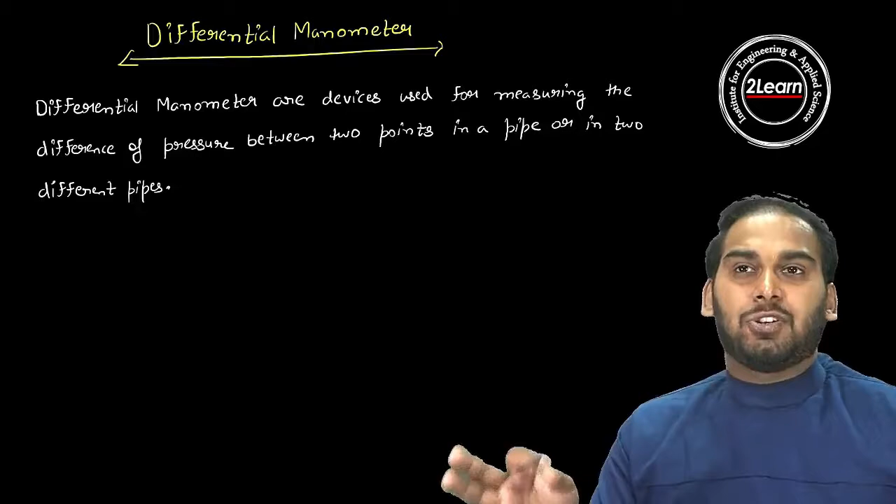So let's start by differentiating the simple manometer from the differential manometer. The first part is differential manometer. Differential manometers are devices used for measuring the difference of pressure between two points in a pipe or in two different pipes. So here we saw what function the differential manometer performs.

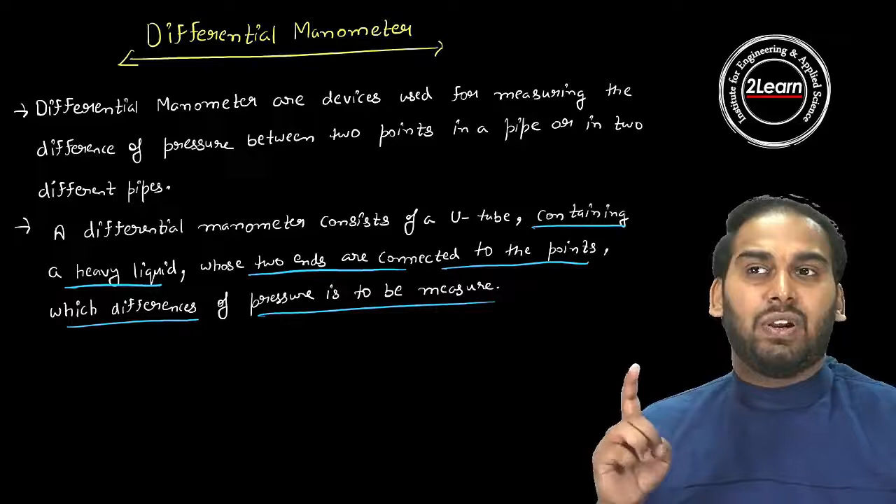Next, the second point is that a differential manometer consists of a U-tube containing a heavy liquid whose two ends are connected to the points where the difference of pressure is to be measured. So all these things come under differential manometer. We will draw a figure for this and clarify how the U-tube manometer appears here.

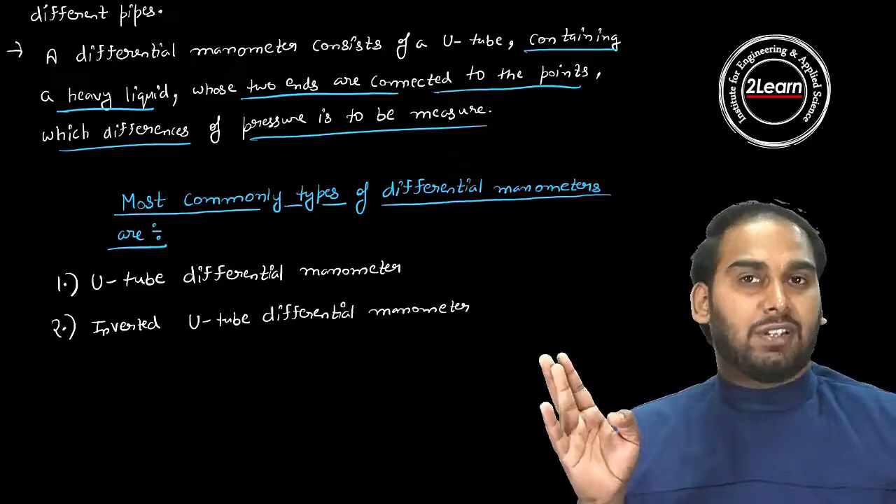So the most common types of differential manometer are two: the U-tube differential manometer and the inverted U-tube differential manometer. We will draw figures of these and see what type these manometers are.

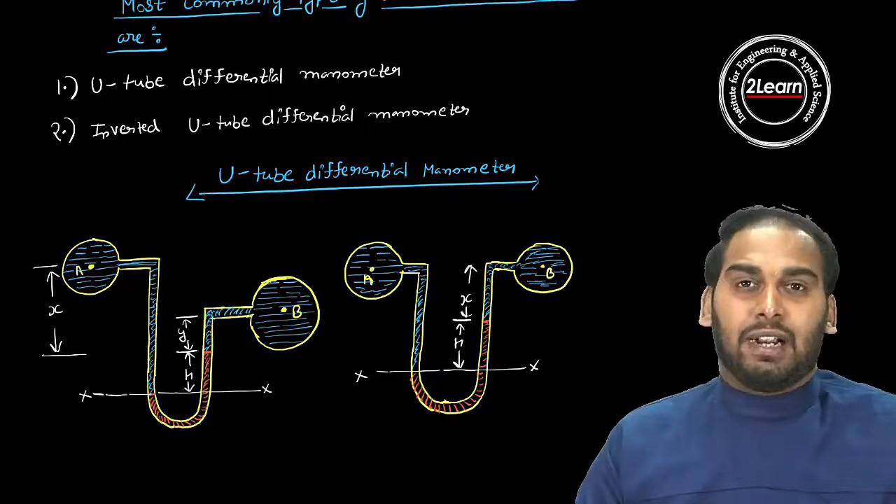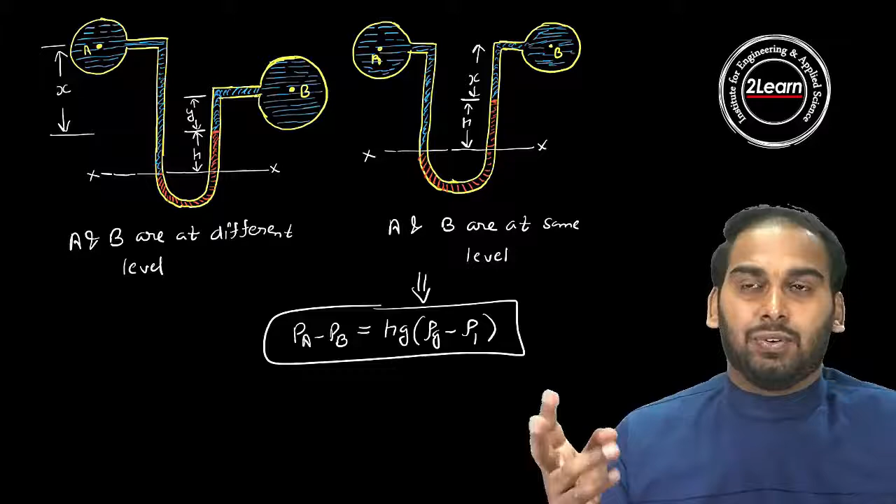Now the pressure variation is PA minus PB equals h g into rho g minus rho 1, where rho 1 is the particular density of fluid. It is rho 1 g into x plus h.

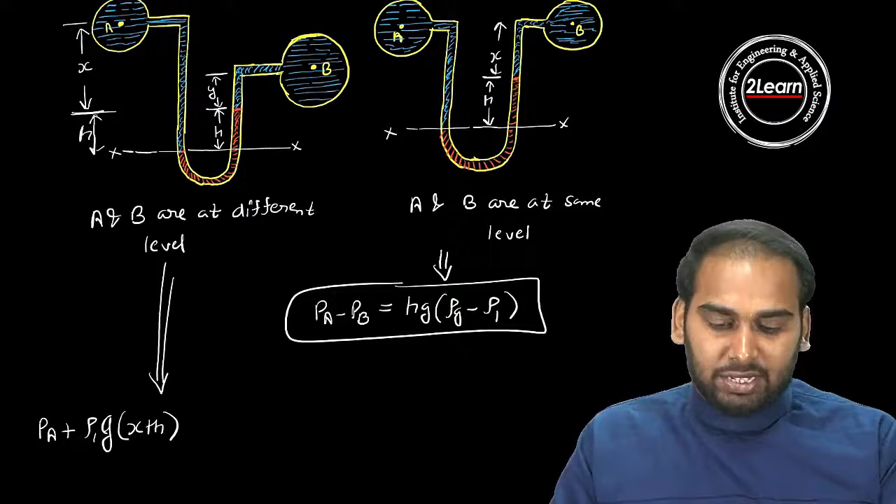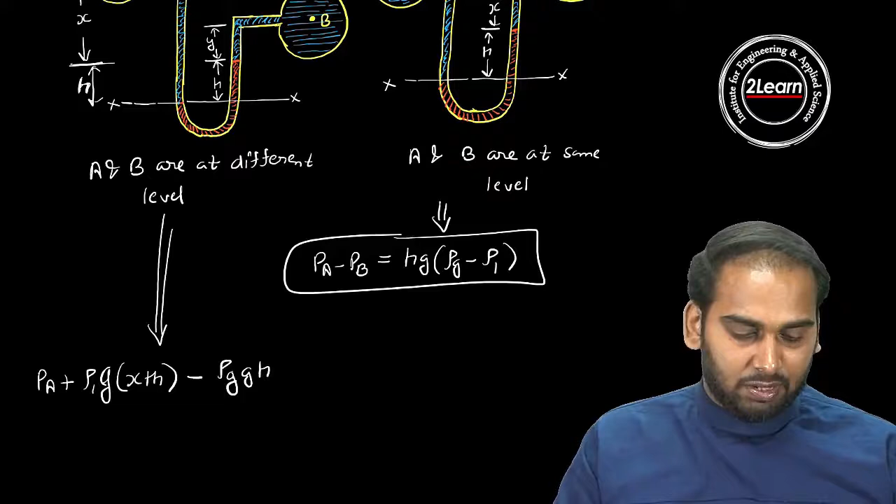Why did we write this? Because x is the vertical distance, and after that it will be h, so total h is x plus h. So in place of rho 1 g h, we wrote rho 1 g into x plus h. Minus, now moving in the upper direction, it becomes rho g into g h, till this one point.

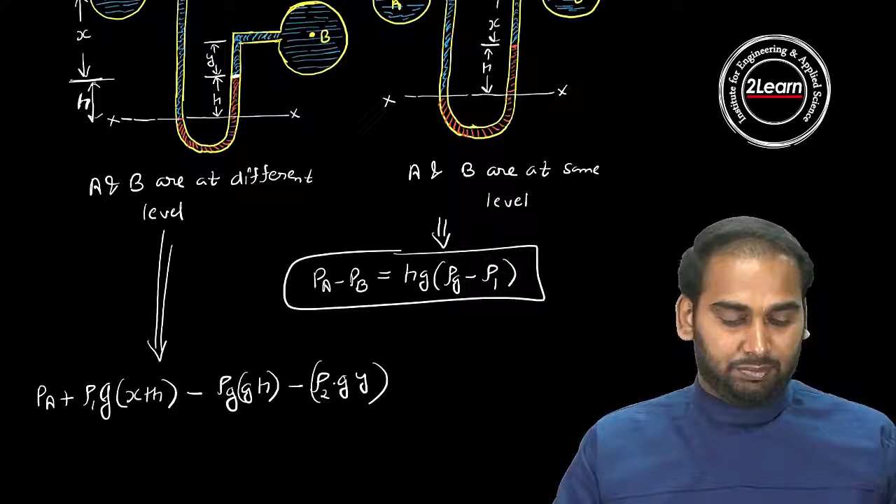Then for the y distance we take rho 2 into g into y, which is the particular density of fluid, and this equals PB. So PA minus PB will be equal to rho g into g h plus rho 2 g y minus rho 1 g into x plus h.

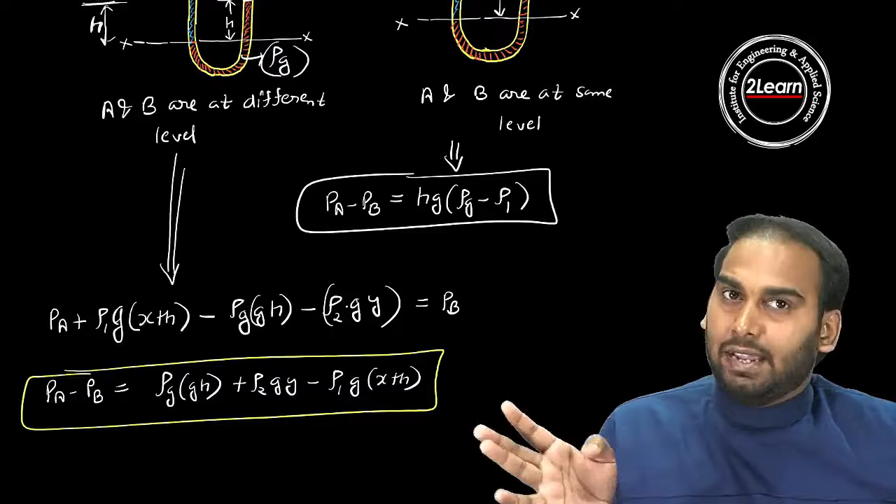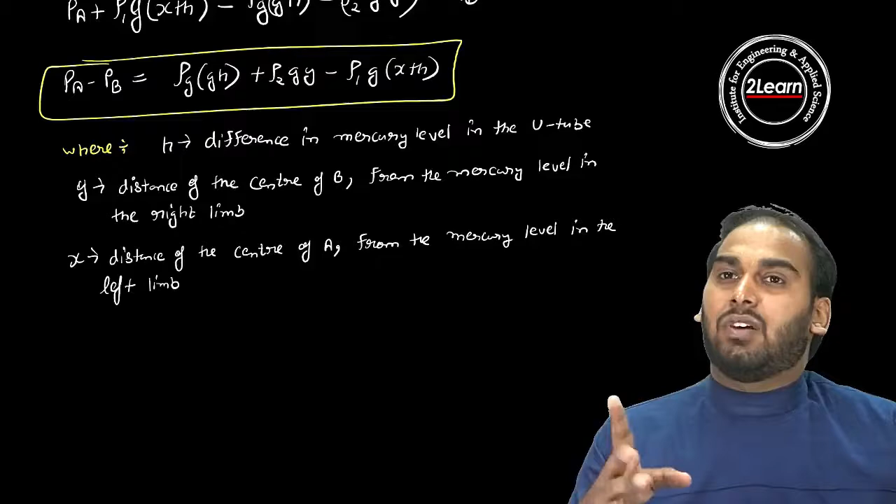So h is the difference in mercury level in the U-tube, y is the distance of the center of B from the mercury level in the right limb, as we have already seen, and x is the distance of the center of A from the mercury level in the left limb.

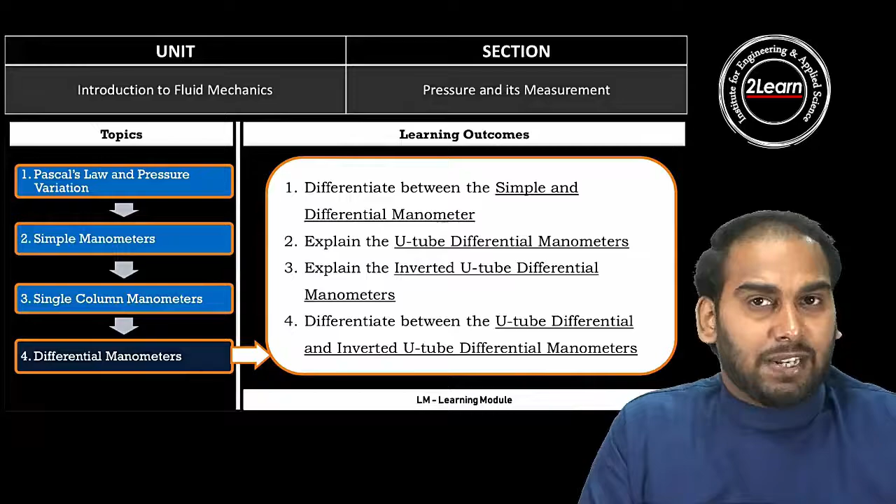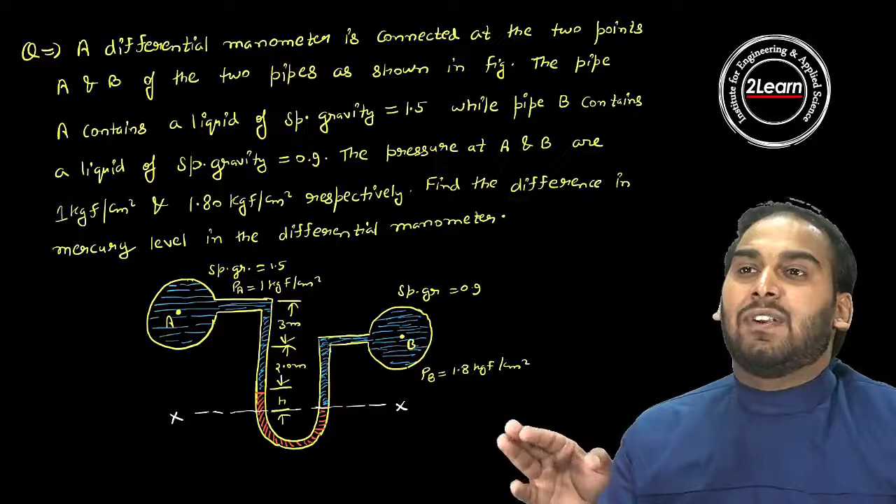So the question is, a differential manometer is connected at two points A and B as shown in the figure. Pipe A contains a liquid of specific gravity 1.5, and pipe B contains a liquid of specific gravity 0.9. The pressure at A and B are 1 kilogram force per centimeter square and 1.80 kilogram force per centimeter square. We need to standardize the units here. Find the difference in mercury level in the differential manometer. So let's start with the given data.

S1 is given as 1.5, then we can calculate rho 1. We multiply by 1000 to get the density.

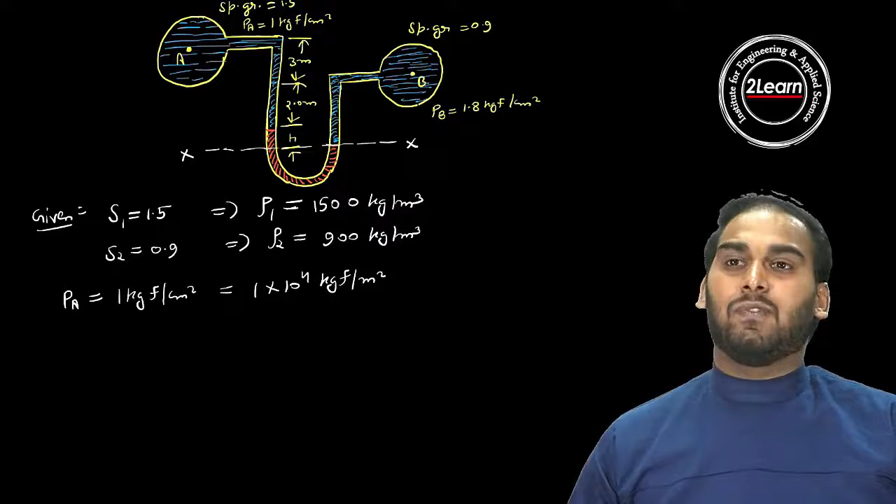Now PA is 1 kilogram force per centimeter square, so it will be converted to kilogram force per meter square. First we convert centimeter square to meter square: 1 meter has 100 centimeters, so centimeter square becomes 10 to power minus 4 in the denominator, which when converted becomes 10 to power 4. So it is 1 into 10 to power 4 kilogram force per meter square, and we know 1 kilogram force equals 9.81 Newton. So it becomes 10 to power 4 into 9.81 Newton per meter square.

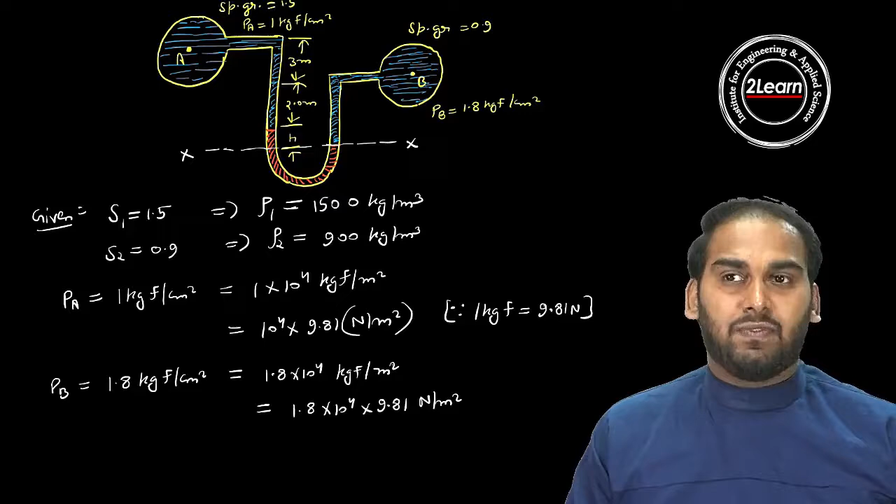So PB is given as 1.8 kilogram force per centimeter square. First it is converted into meter square, so it becomes 1.8 into 10 to power 4 into 9.81 Newton per meter square. The density of mercury is 13.6 into 1000 kg per meter cube.

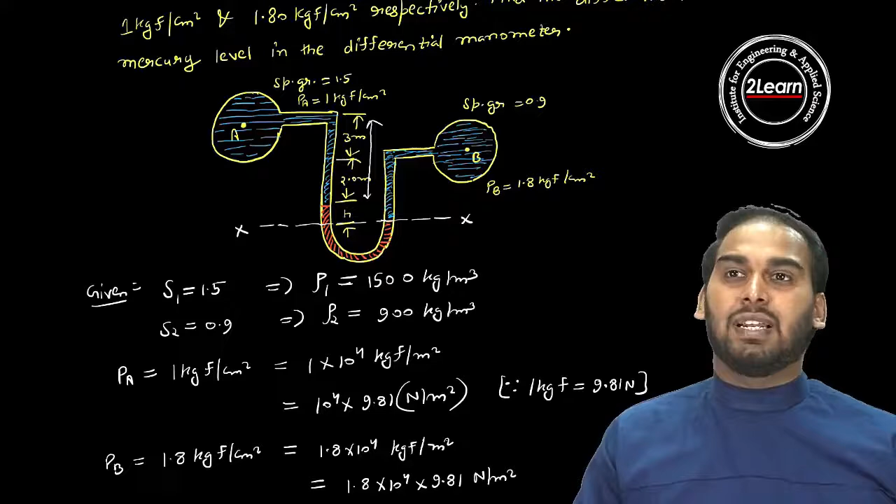Now we talk about the next part. Here it is 3 plus 2, we take this distance from here to here, then we get 5. That is 1500 rho, then g and h will be 5 here, plus PA which we calculated, this part is put here.

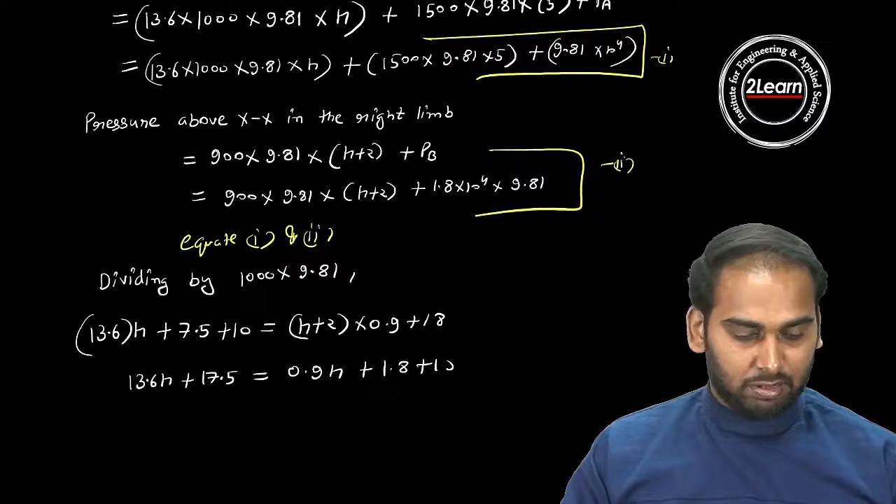Then it is h plus 2 into 0.9, positive 18. It is 17.5. It is 0.9h plus 1.8, positive 18. Then it will become 0.9h, positive 19.8.

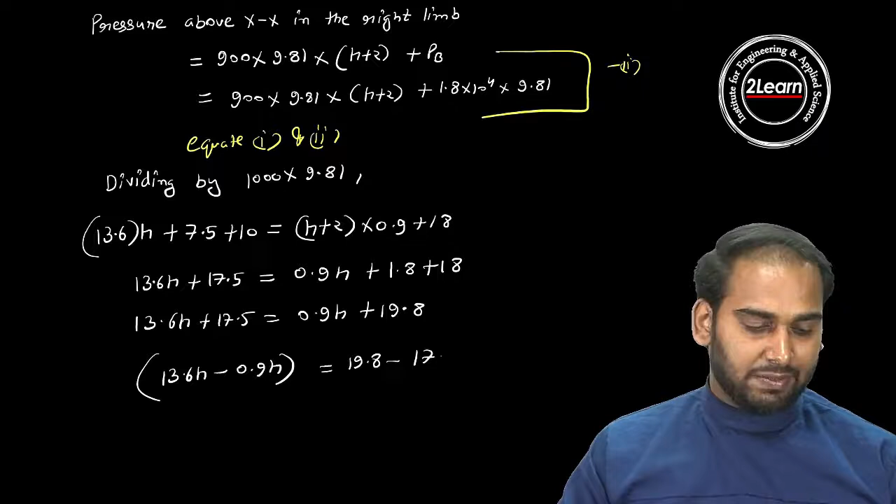So 13.6h minus 0.9h, 19.8 minus 17.5. Now we are able to find the value of h. So h is 18.1 centimeter.

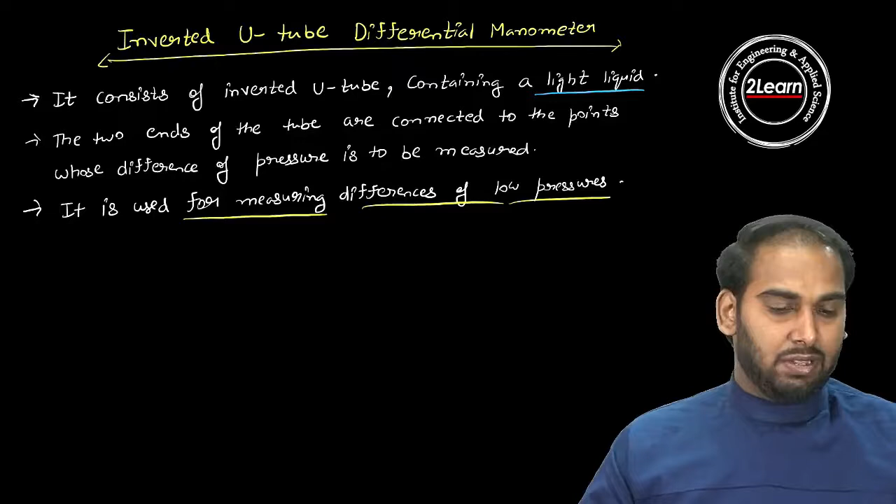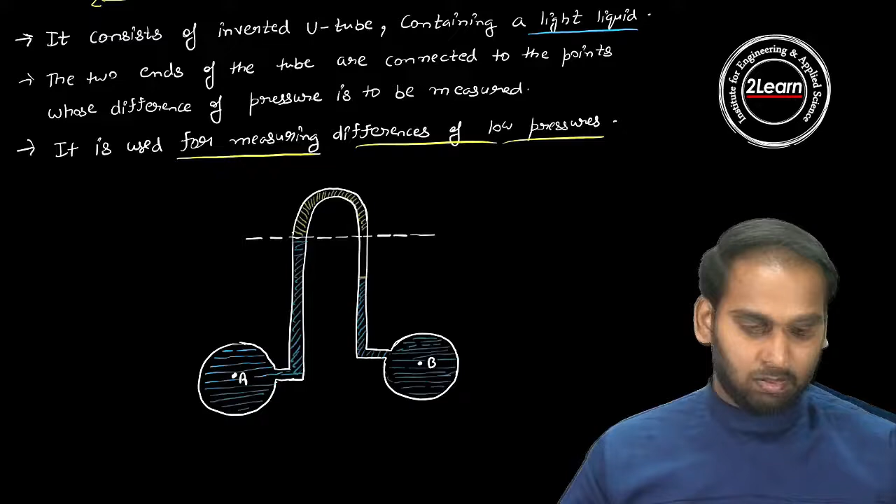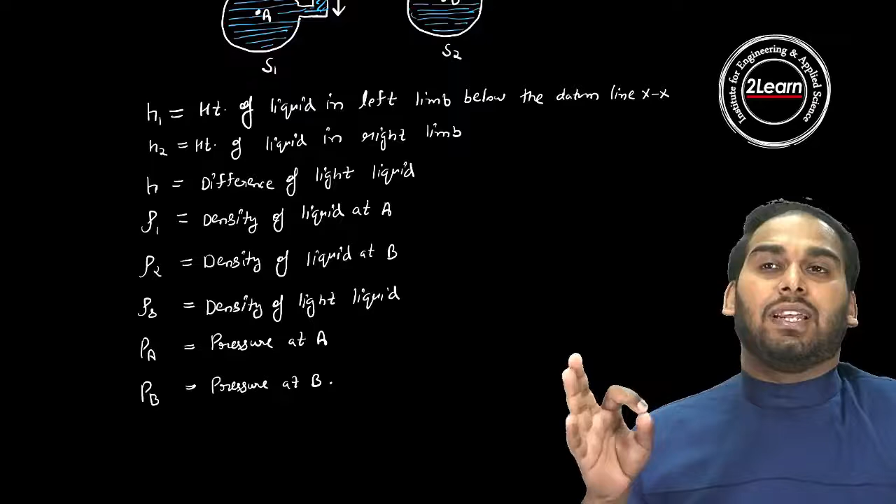These are the considerations here: H1 is height of liquid in left limb below the datum line XX, H2 is the height of liquid in right limb as we can see in the figure, and H is the difference of light liquid. Rho 1 is the density of liquid A, rho 2 is the density of liquid B, rho S is the density of light liquid, PA is the pressure at A and PB is the pressure at B. This is the diagram and definitions of inverted U-tube manometer.

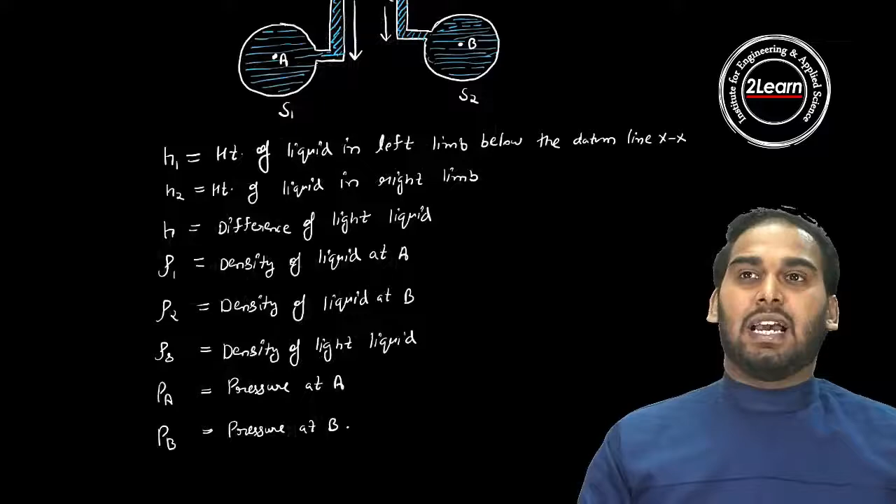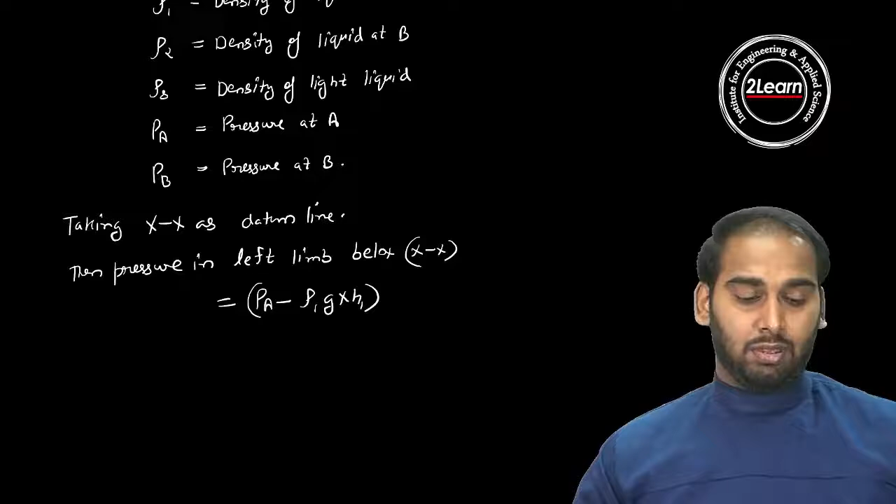Now, taking the help of the datum line method, we have to calculate pressure PA and PB. As we have seen, pressure in the upward direction is taken as negative. So we take rho 1 G H1 as negative, because the height we took while studying hydrostatic force: if H is taken in the downward direction it will be positive, and if H is in the upward direction it will be negative. So PA is positive and in the upward direction it will be negative: rho G into H1.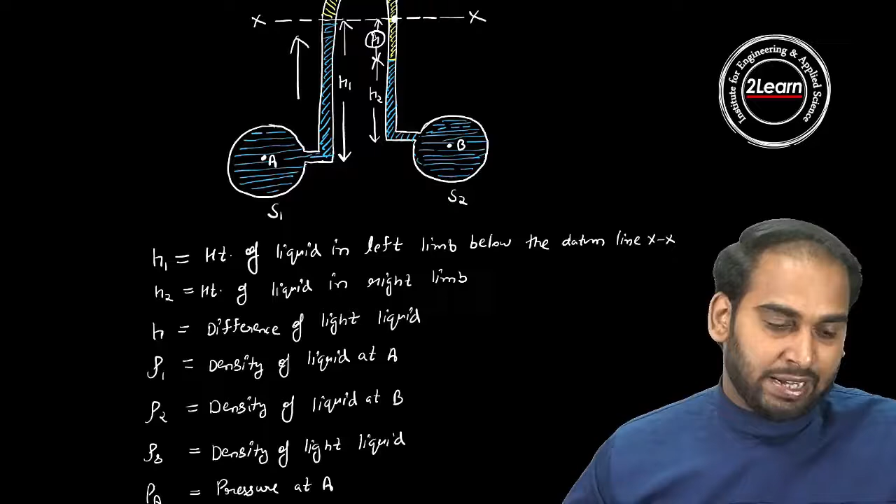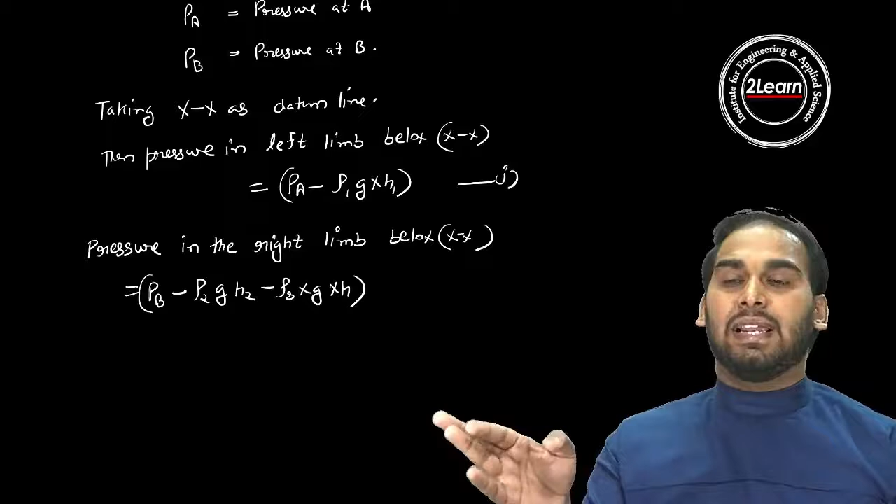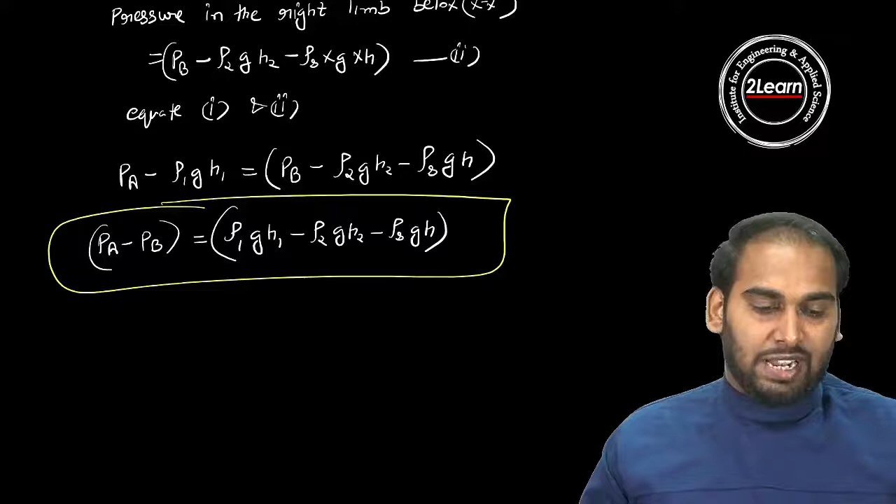I hope you understand this topic very well. So now we have been studying the inverted U-tube differential manometer. Before proceeding to the next part, let us check your knowledge.

In the given figure, an inverted differential manometer is connected to two pipes A and B which convey water, and the fluid in the manometer is oil of specific gravity as given. For the manometer reading shown in the figure, find the pressure difference between A and B. Let's start.

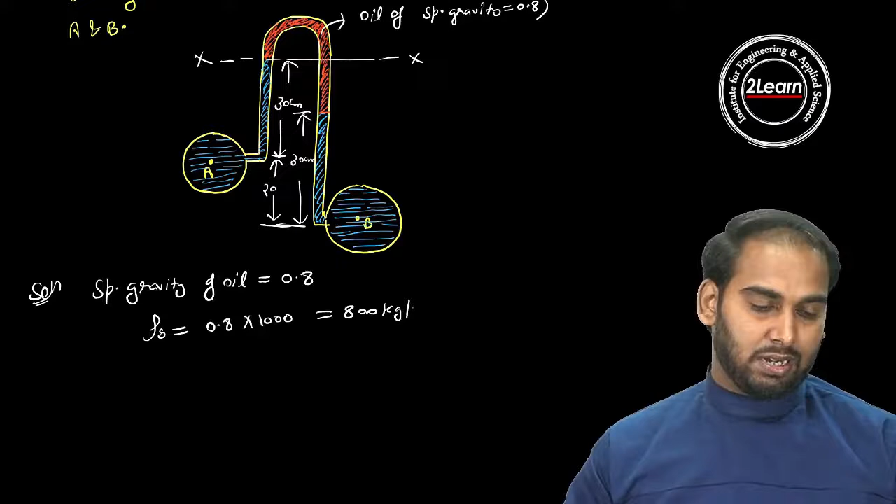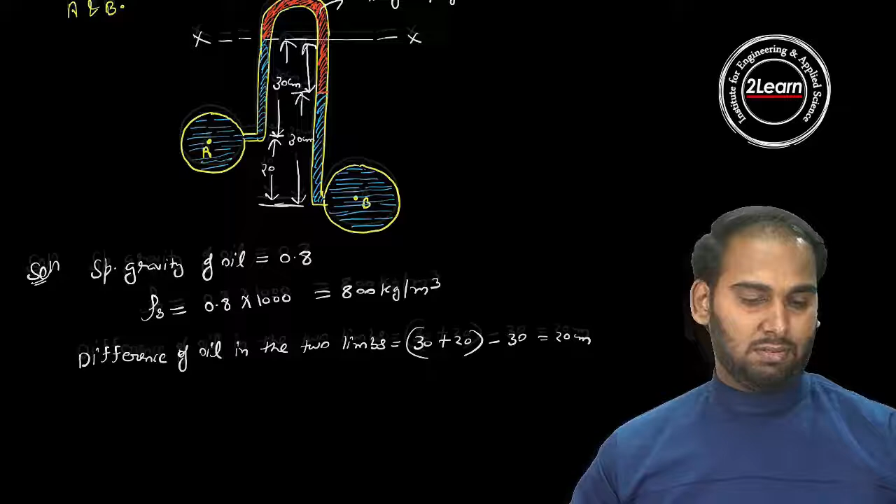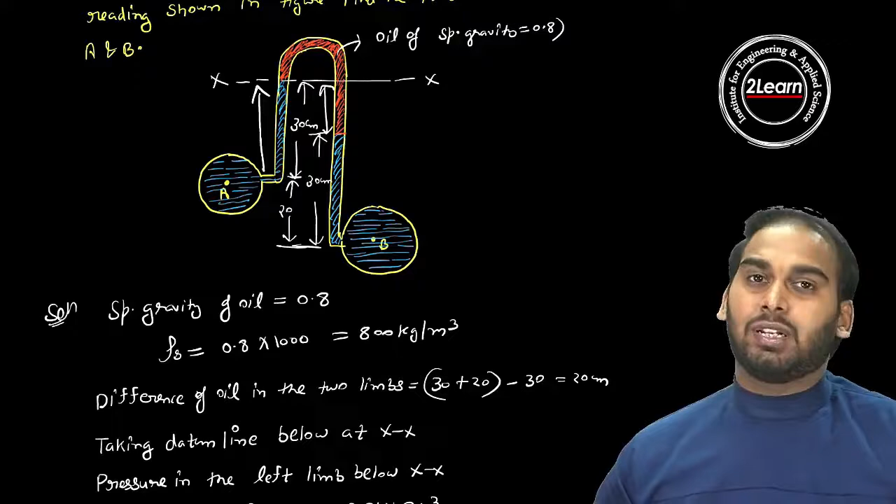Taking the datum line below at x-x, the pressure in the left limb below x-x, as you can see, in the upward direction the distance is 30 centimeter, which converted into meters gives 0.3. So here PA minus rho GH, and H will be 0.3. Rho is 1000 because it is water, and G is 9.81, into 0.3. By calculation it will be PA minus 2943.

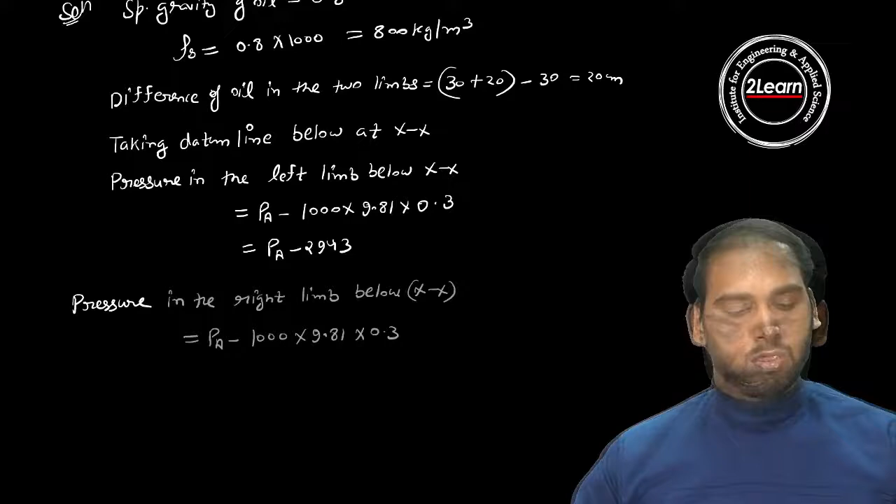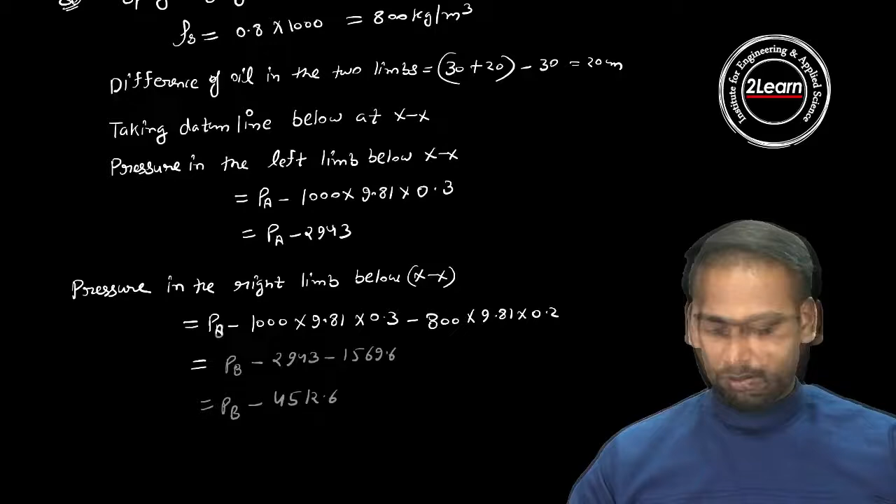So in the right limb, similarly, PB minus 1000 into 9.81 into 0.3, minus 800 into 9.81 into 0.2, using the distance rho GH. Now again, using the datum line method, we can call this first equation and this second equation. Now equate them.

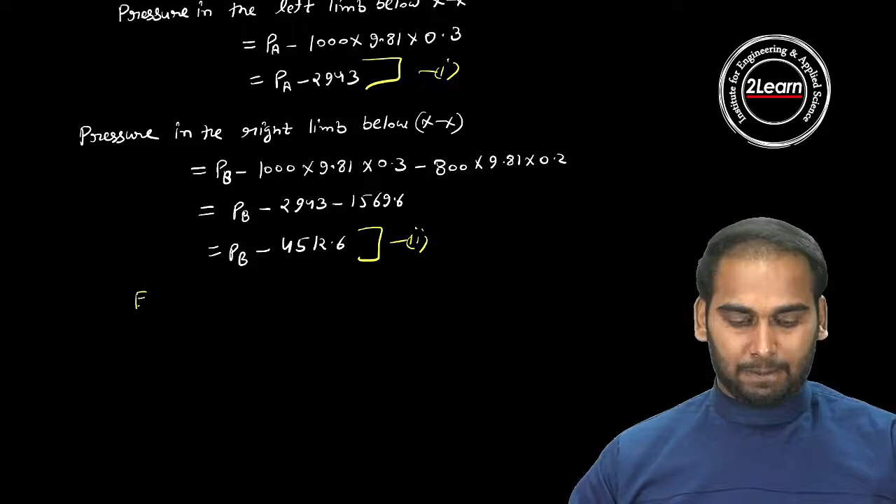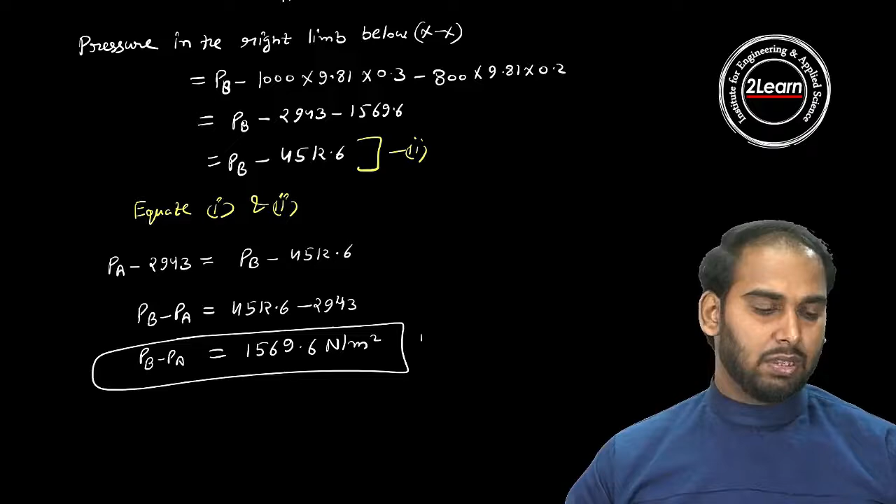Equating first: 4512.6 minus 2943, then it will give 1569.6 Newton per meter square. That is the answer. So same method, same concept, but here the directions of the heights change, and according to that we change the sign to get the answer.

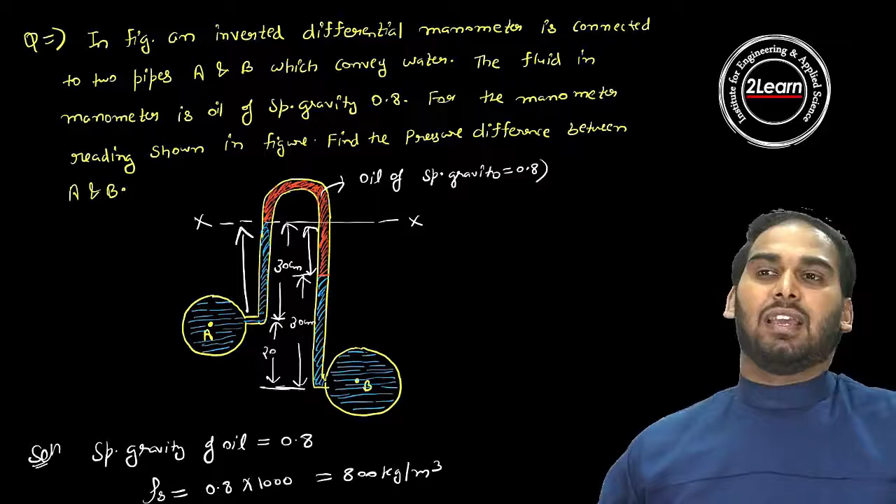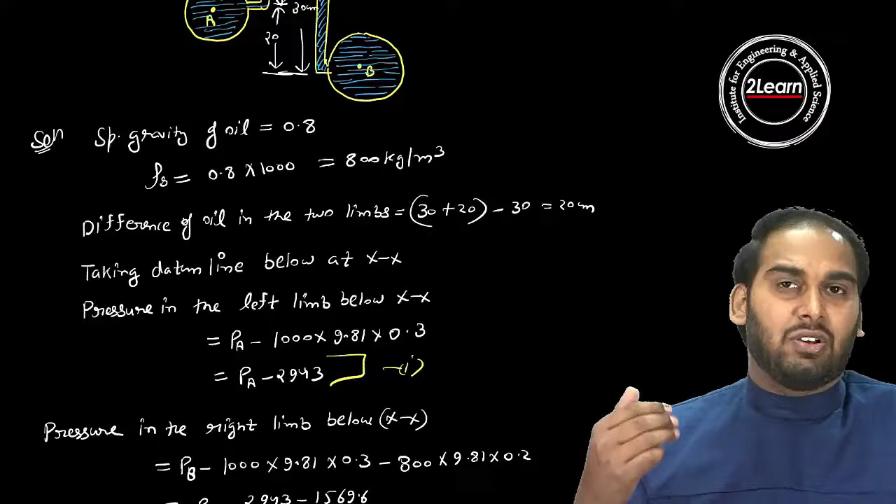I hope you understand this numerical. In this numerical, whatever data was given, according to that we gave the notation here. After that we found the pressure at the left limb and at the right limb, and according to the datum line method, equated them to get the value of PB minus PA, which is 1569.6 Newton per meter square. I hope you understand this numerical very well.

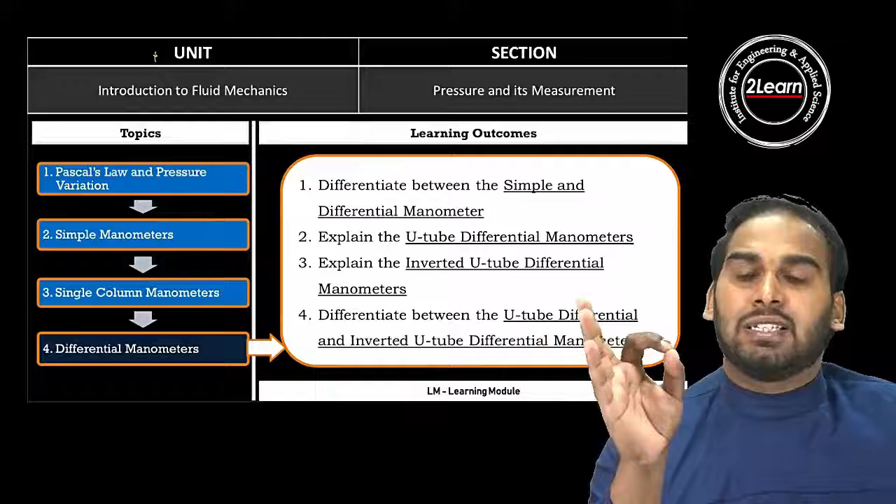And the fourth one is differentiate between the U-tube differential manometer and inverted U-tube differential manometer. I hope you understand these 4 learning outcomes related to the U-tube differential manometer and inverted U-tube differential manometer.